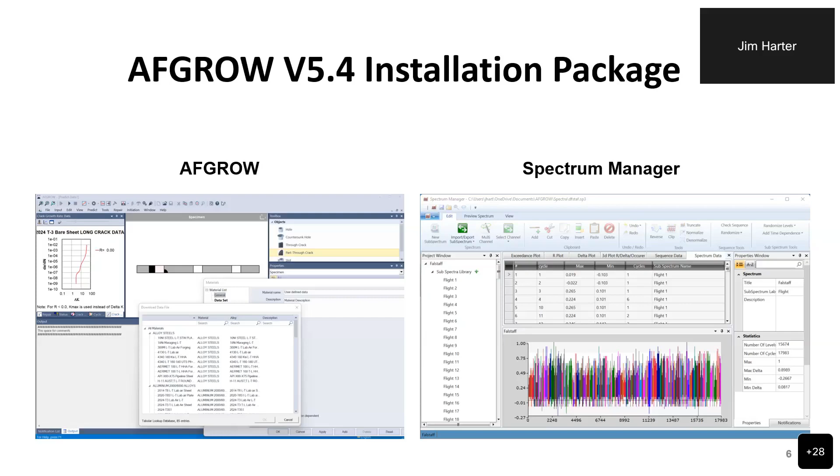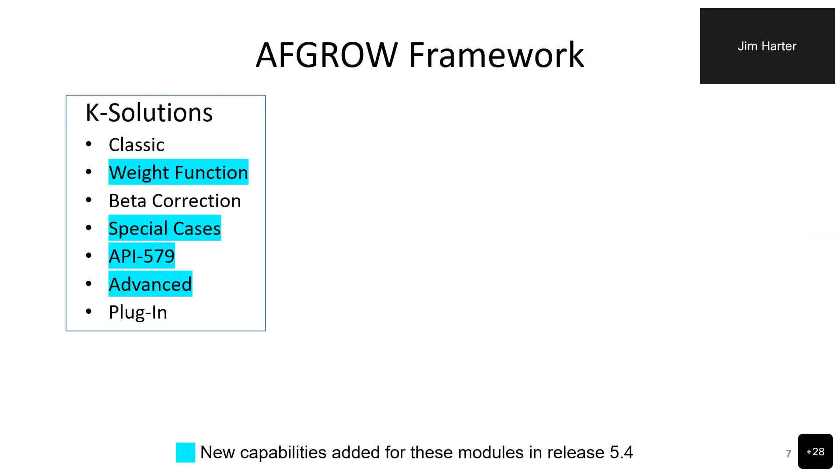Now the framework for AFGROW, and I really want everybody to think about AFGROW as a framework because it contains many different capabilities and features, starting with our K solutions themselves. What's highlighted in blue will have new capabilities in this version for each one of the modules. Under crack growth rate models, we have the Forman equation, Harter-T method, the NASGRO equation, version 3 of NASGRO, table lookup capability and the Walker equation. Table lookups are highlighted as well: as part of this release, we have a new database for table lookup models taken from the AFMAT database.

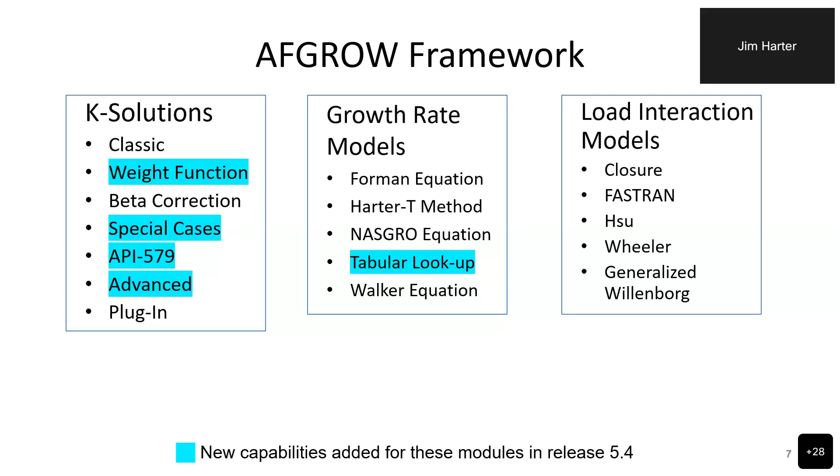For load interaction models, we have the closure model, Jim Newman's FASTRAN model, the Hsu model, Wheeler model, and the generalized Willenborg model. None of these have been changed in this current release. They're the same as they were in previous releases.

And finally, in our tools, we have the ability to view output in Excel, cycle counting option, crack growth, residual stresses, time dependence, crack initiation, and corrosion effects. Crack initiation is highlighted because we've added several new materials. The parameter database is extended to about 35 materials in that crack initiation capability.

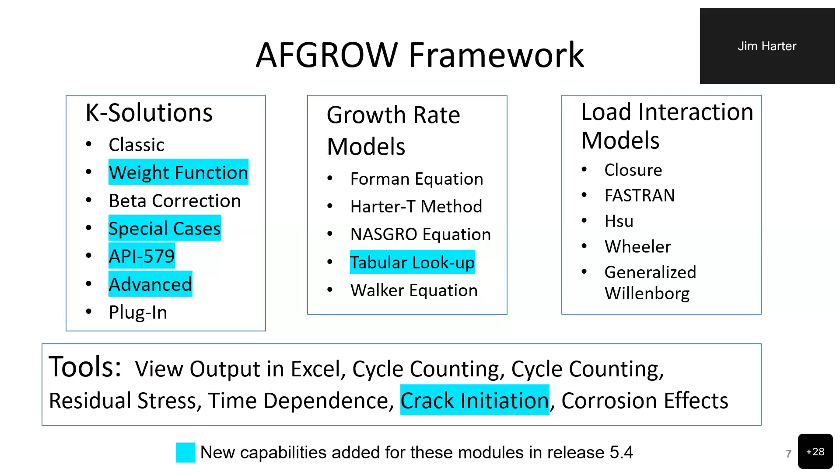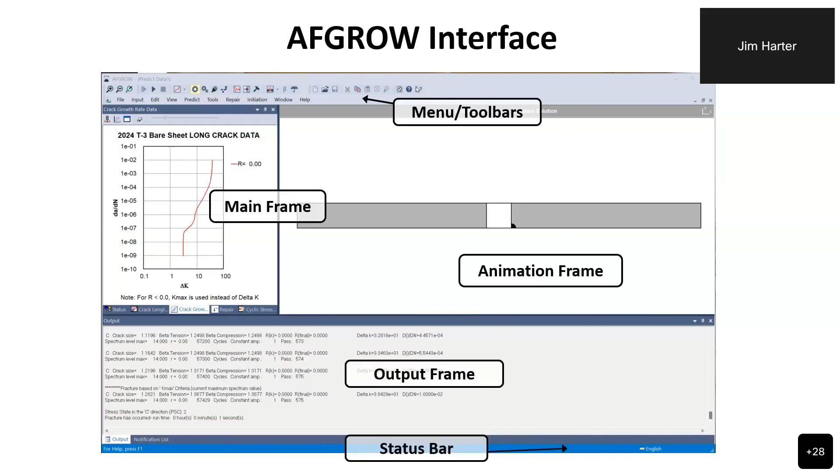As many of you probably know if you've used AFGROW, this is an overview of the different views in AFGROW. We have our toolbar, main frame, animation frame, output frame, which also includes a notification list for any time you've exceeded the capabilities or recommended limits for a K solution. It'll notify you of that, and then of course a status bar at the bottom.

Now, I want to go over the major new features and capabilities. The biggest one is the new advanced solution for combinations of corner and through cracks at a hole. For version 5.3 and earlier, when you had two corner cracks at a hole in the advanced model and one transitioned through the thickness, we had to automatically transition the second crack. So there was a little penalty, because we didn't have the solution for a corner crack on one side of a hole and a through crack on the other. And now we do, including axial, bending and bearing solutions. That was a very big deal for us, our most important enhancement for version 5.4.

In addition, we added a 2D multi-site damage capability. This has been asked for a long time, and the problem was that we had solutions for 2D or through cracks under axial load for just about any geometry, but when we had the bearing load, fastener load in a row of holes, the fastener load at adjacent holes actually manifests as axial load in the adjacent holes. So it became quite complicated because it depended upon the hole size, the hole spacing, and so forth.

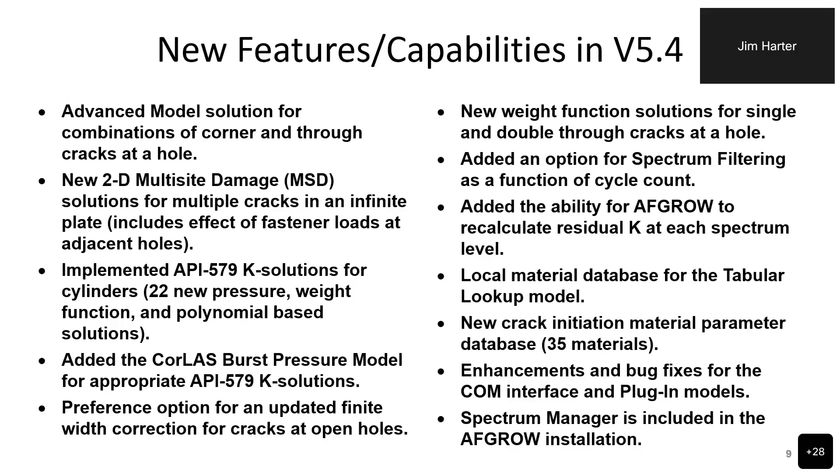And we have a local material database for the table lookup. I mentioned that a little bit ago in the last chart, but we now include the database in the installation. We have 35 new materials, as I also mentioned, for our crack initiation capability. And there have been a lot of enhancements and bug fixes for the COM interface plugin models. And as I said, the Spectrum Manager is now included with the installation.

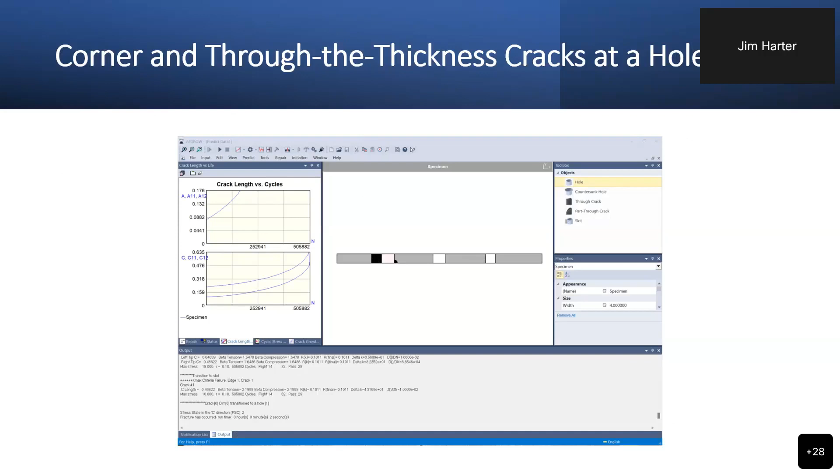So here's the picture of the case with a corner crack on one side of a hole and a through crack on the other. Again, this was a very big breakthrough for us, because the possible combinations and the ability to do axial, bending and bearing was very difficult, but now I think we finally got it handled and it works very well.

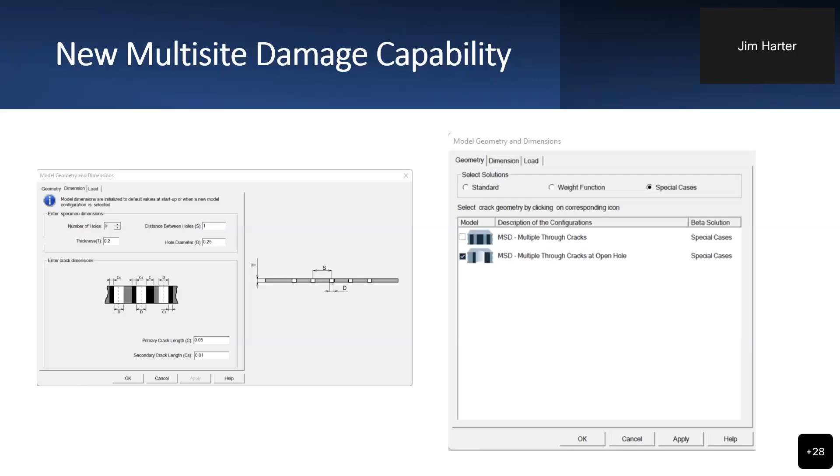So I mentioned the finite width situation, and there was a recent effort as part of the Engineered Residual Stress Implementation working group, comparing different K solutions to finite element results. And what we discovered, when you looked at very high resolution finite element models for cases where your width to hole diameter ratios went below 6, was that the Newman-Raju width corrections would end up being too low, and that was a problem.

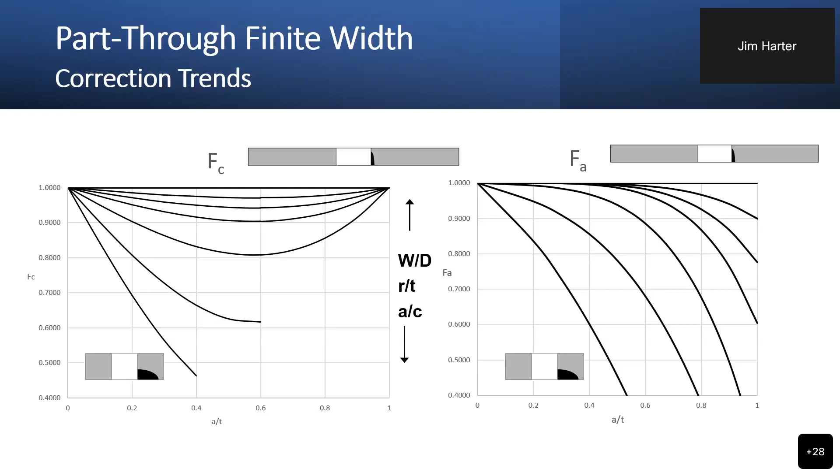So we've added capability in AFGROW in our preference menu. You can either use the standard Newman-Raju correction as the default, and people told us that they wanted it done that way so that any predictions you made in the past, you can get the same answer if you do it in the future. But if you wanted to apply my additional correction, you could choose to do that as an option. And for cases when W over D goes below 6, or you might have A over C that goes lower, you might want to consider doing that.

Now, the new weight function solutions, we have 3 of them. We have the weight function solution for the single edge corner crack, and we have a solution for a single through crack at a hole or a double through crack at a hole. So those are new weight function solutions. And for the corner crack case, the big news here is that this is the first model that we can use the stresses changing in the C direction instead of the standard A direction that's been in the past.

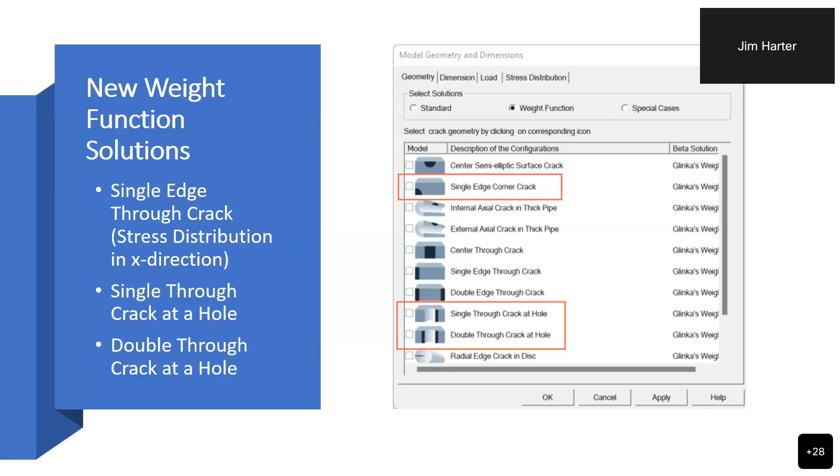Now, this is our new tabular lookup growth rate database. So if you go into the table lookup option and you open up the database, you'll see right now we have, in this release, 85 materials, steels, aluminums, titaniums, we have a lot that's been fit. And we continue to add to that. At this time, I think we're up to more than 90, and that'll just keep getting rolled into the future releases.

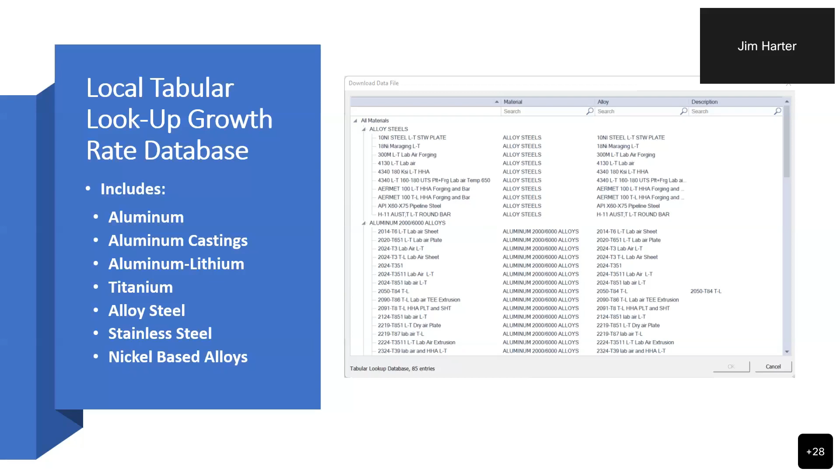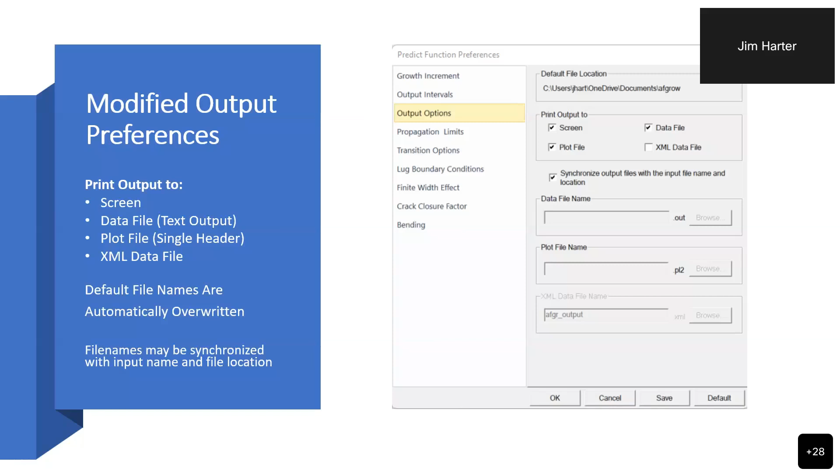Now, this is another feature that people have wanted for a long time. In your output, if you wanted to have a plot file, a data file, or even an XML file, and you wanted them all to be placed in the same folder. So if you were doing some sort of analysis and you said, I want to create a folder for this analysis, I want everything to go there. Well, if you click on the option synchronize, you pick your file name, it will synchronize the first part of the file name, and it will put all of those files in that same folder. So people wanted that for a while, so now it's available to you.

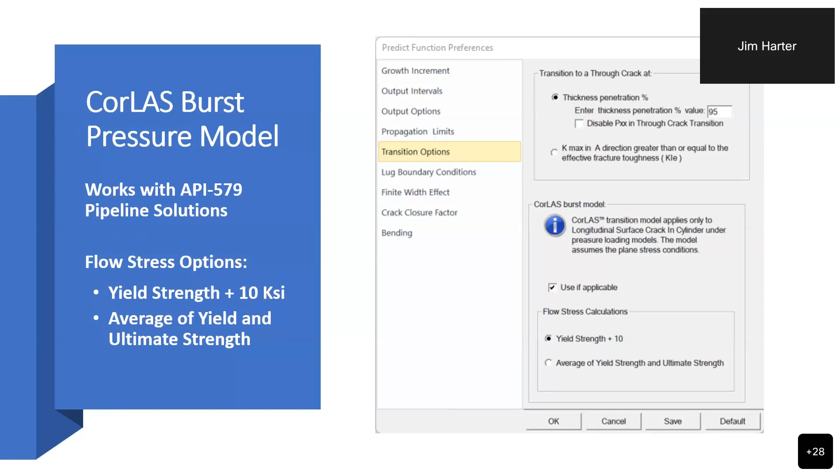Now, another feature that people have wanted for a long time is the ability to not only tell you the answer in hours, but now it will plot in hours. So if you say, I like to display my lifetime in hours, then when you run AFGROW, instead of only just telling you at the end what the hours were, it will plot in terms of hours.

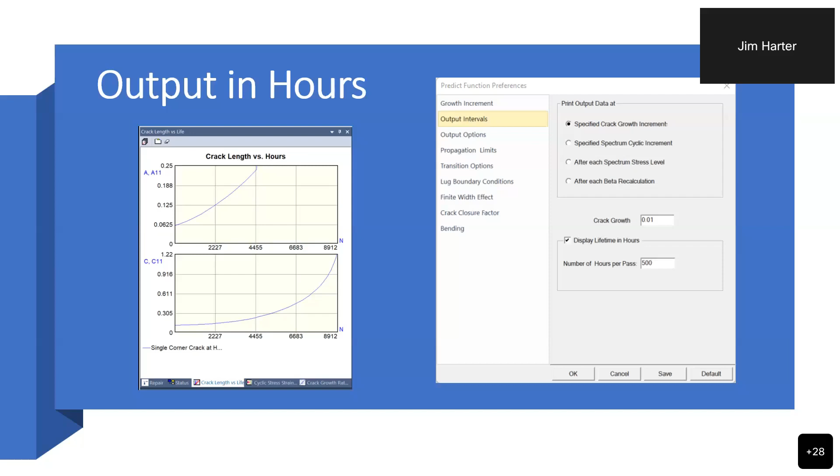The only thing to remember here is if you do several different analyses and you wanted to use hours for some and cycles for others, and you were overlaying them on the crack length versus cycles plot, then it would revert everything to cycles because it can't do both. So whenever you use this option, you need to keep all of them that way if you're overlaying the plots. Otherwise, it will revert back to cycles. But this feature has been something that we've been wanting to do for a long time, and now we have it.

Now, the filled unloaded hole correction that we had for some time in the classic models for corner cracks at holes, we've now made that available for filled unloaded holes in the advanced solution. Now, we're trying to improve this, but for right now, if anything, it'll be a little bit conservative because we're using the correction for through cracks and we're applying it to part through cracks, and data that we've seen so far shows that that's probably going to be conservative, but at least gives you some benefit for the filled hole for part through cracks.